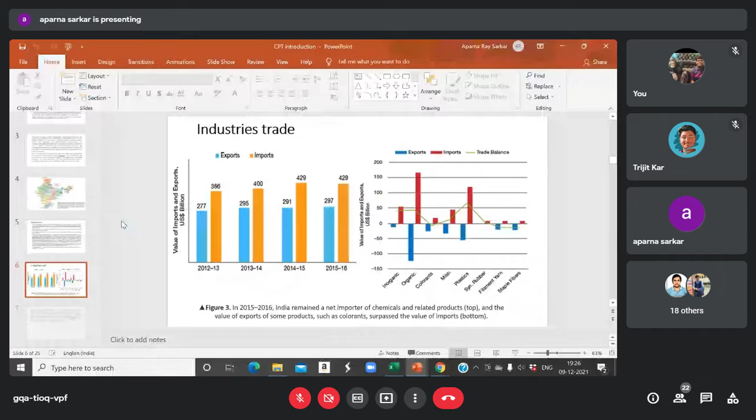So in case of import, in 2013-14 we have 400 US dollar in billion for the import section, whereas in case of 2016 we have 429 billion dollar. So these are the results of import and export.

Now another picture we have where we can see in which sector how much money we are investing and collecting. So first consider the inorganic chemical section.

So here we can see for exports the value is showing negative data, and for imports we are having 50 US dollar. For exports and imports, both are different, therefore we are having this type of opposite values, therefore we are having negative positive value.

Among these - inorganic, organic, colorants, miscellaneous, plastic, synthetic rubber, filament yarn, and staple fiber - we can say that in case of organic chemical, the export value is highest, that is near about minus 150 US dollar in billion. The similar result we can see in case of imports, where we have 150 US billion. And for the lowest exports, we can see in case of inorganic.

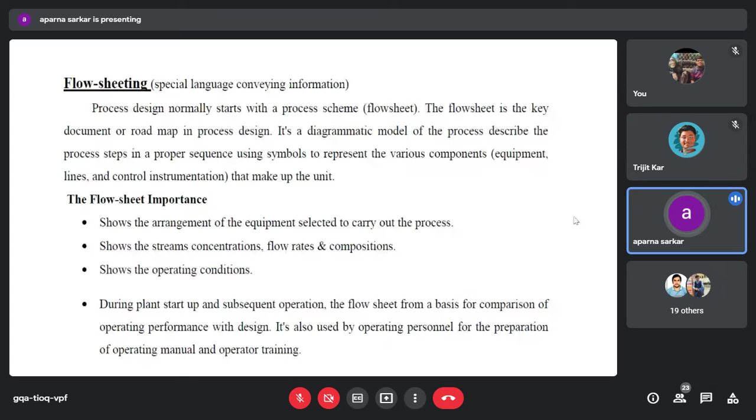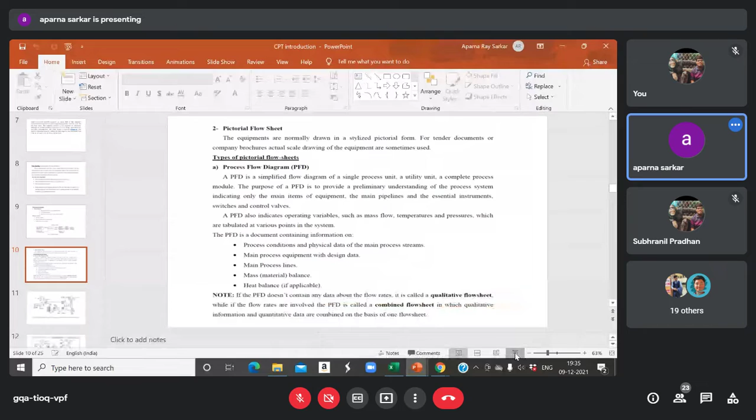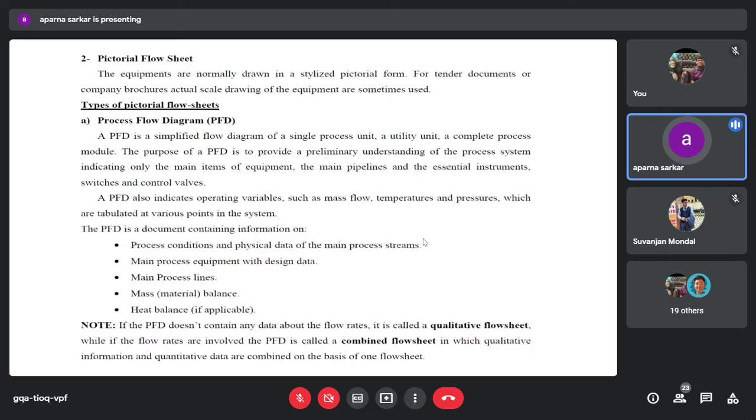Under pictorial flow sheet we have PFD, then we have P&ID and PEUFD, then PSFD.

What is PFD? PFD is process flow diagram. Here is a flow sheet, that is a PFD, a qualitative flow diagram for the manufacture of nitric acid by the ammonia oxidation process.

In this PFD plot, we can see that lots of unit processes are given as symbols. This, numbered as 1, is the ammonia feed, which is numbered. Then first ammonia is coming into the vaporizer section - vaporizer is the unit process, so that is written with the symbol of a vaporizer. Then 1A, meaning after vaporization a new form of ammonia we are getting. Then we have 2A, where this 2A is coming - that is the air.

The arrow in every section you are watching - those unit processes are drawn like a filter, and they are also numbered. Every unit used in this process for the production of nitric acid is written with a number and proper symbols. Proper symbols mean unit operations with arrows. So this is the PFD diagram.

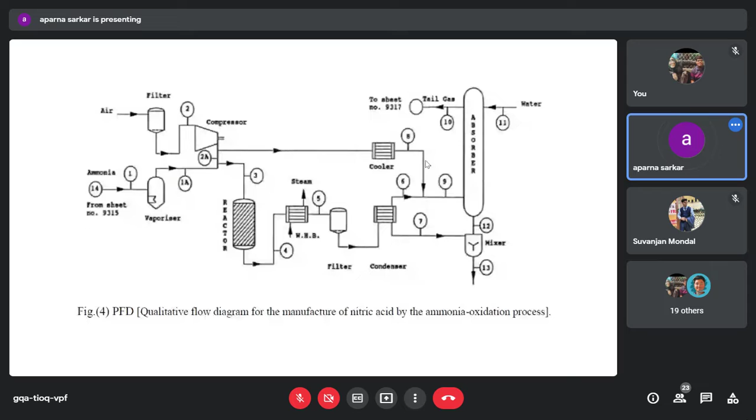So what does this P and ID include? All process equipment is identified by an equipment number. We have pipes, pumps, instruments, valves and other fittings. All pipes are identified by a line size, material code and line number, and all valves with an identified size and number. Then fittings are there, and all pumps are identified by a suitable code number, along with control loops and instruments. So these are some features of P and ID.

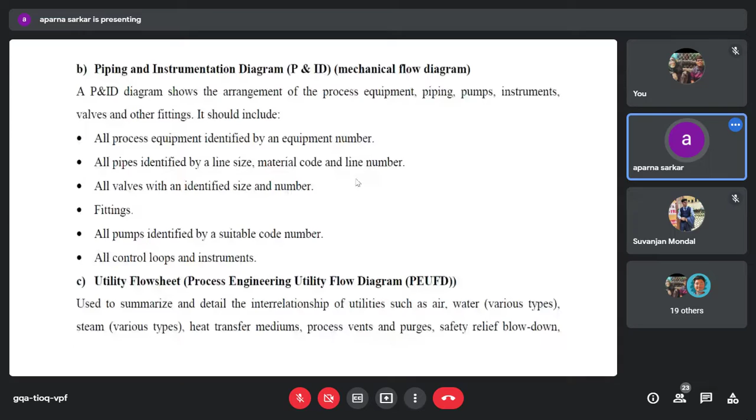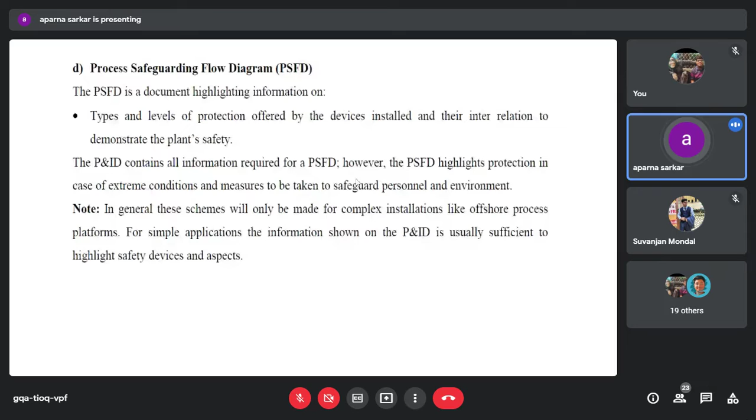Then another diagram we have is the PEUFD, which is a document containing information about utilities. A typical process uses utilities such as water, air and electric power. Water may be used either in the process or for cooling or for production of steam. This air may also be used in the process or for instrument applications. PEUFD shall state characteristics and consumption figures of the particular utility concerned: cooling water, fire water, drinking water, steam, plant air, instrument air, fuel, inert gas, and similar utilities.

So with this fitting, valve, and pipe, where we have fuel inlet, drinking water, steam plant, those inlet conditions, those process units are drawn there. Those flow sheets are known as PEUFD.

Now we have another flow sheet, that is process safeguarding flow diagram, PSFD. PSFD is a document highlighting information like types and levels of protection offered by the devices installed and their interrelation to demonstrate the plant safety.

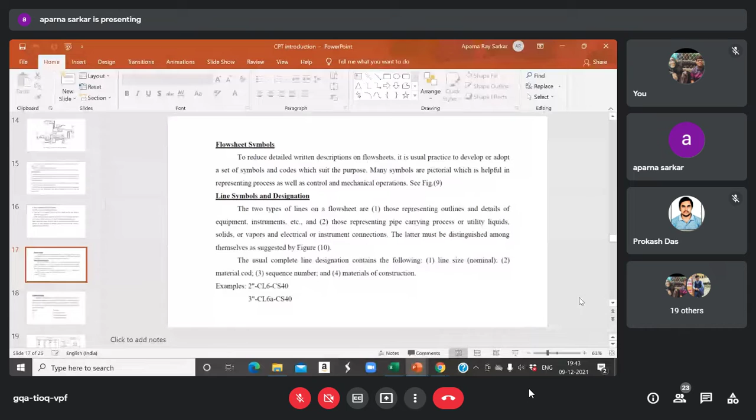Now this is the sign of a horizontal vessel. If we have this outside bracket, this is jacketed or agitated. Agitated means when we have a type of stick, and at the end of the stick we have some blades, this means it is an agitator or stirrer. And any reactor, meaning that type of vessel covered by an outer shell, means it is a jacketed system. This type of jacketed system is generally used for the collection of heat.

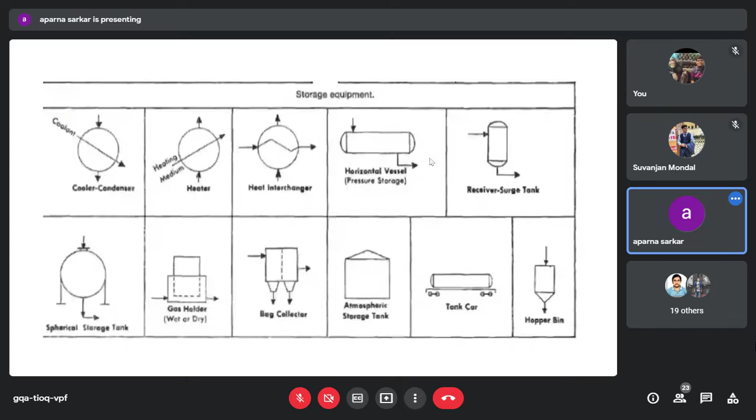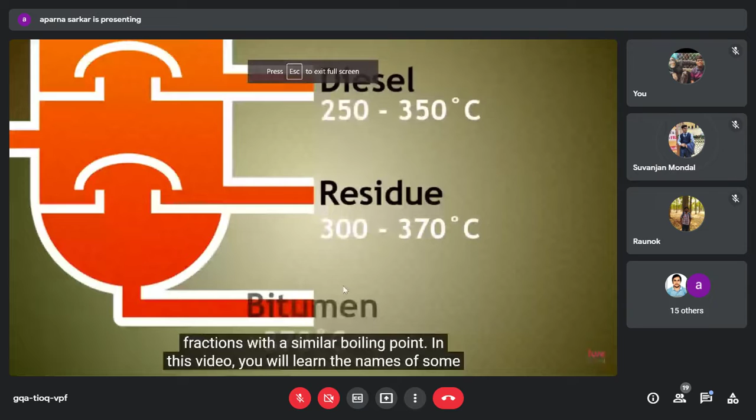In our other videos, we have learned how fractional distillation is used to separate hydrocarbons into fractions. In this video, you will learn the name of some of the most important fractions and their uses. As you are now aware, large hydrocarbons have higher boiling points and so are removed at the bottom of the fractionating column. Smaller molecules condense higher up the column. We will now take a look at some of the common fractions as we move down from the top of the fractionating column. Some of the smallest molecules are between 1 and 4 carbons in length. This fraction has such a low boiling point that it is still a gas when it is removed from the very top of the fractionating column. This fraction is known as refinery gas or bottled gas. Bottled gas, because it can be stored in bottles under high pressure. You could well have seen bottles of propane or butane running barbecues or heaters in your home, and these are examples of the refinery gas fraction.

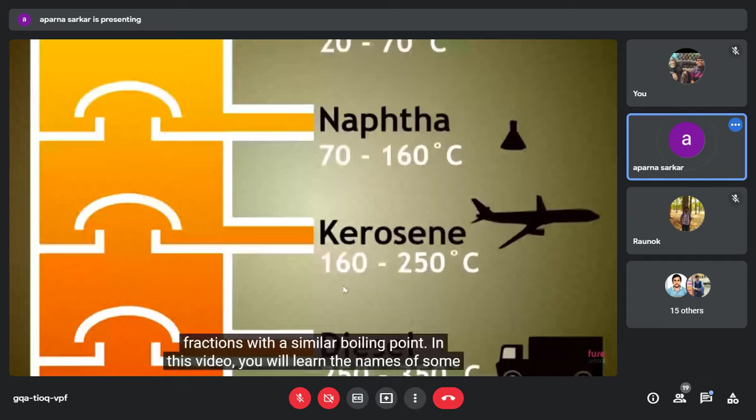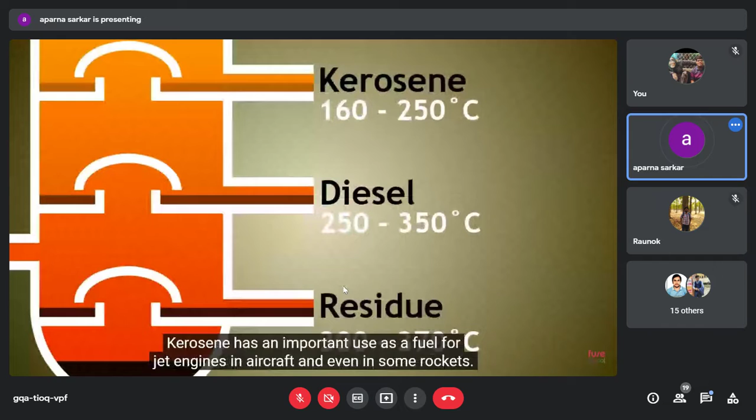Petrol is between 5 to 7 carbons in length. It is still a fraction of small chain hydrocarbons, and therefore these vaporize at a low temperature and are easily ignited. This makes it useful as a fuel in the internal combustion engine of a car or other vehicles. Naphtha is not such a useful fuel, but it is a valuable source of organic molecules, which can be cracked to make more fuels or form alkenes. Alkenes can be turned into polymers. Polymers can make plastics, which are used in our everyday lives. Kerosene has an important use as a fuel for jet engines, in aircraft, and even in some rockets. Kerosene is also called paraffin in some parts of the world. It is a common fuel burnt in paraffin or kerosene lamps used for lighting.

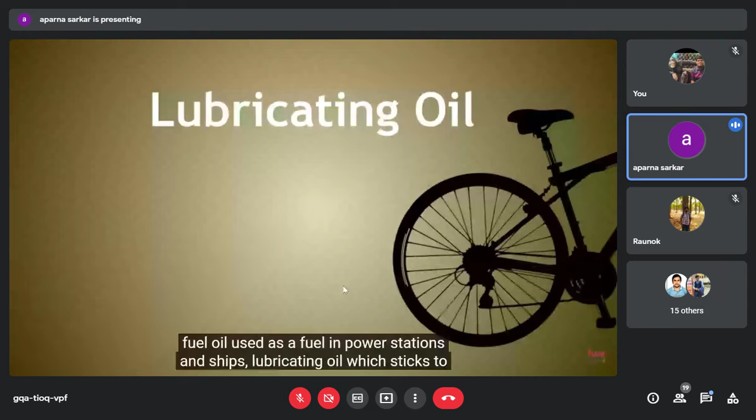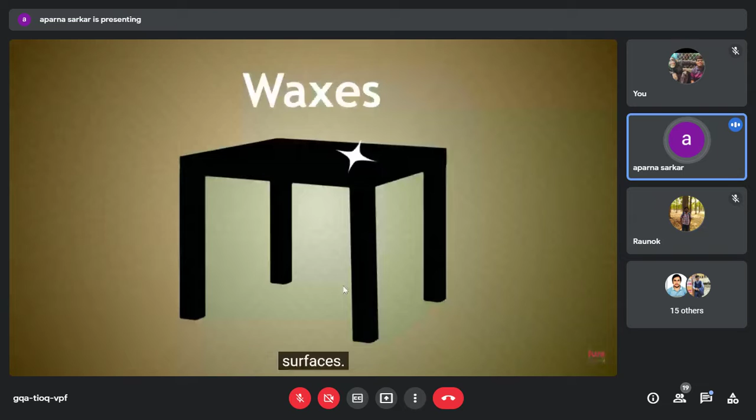Diesel is the next fraction. It is a common fuel in cars, vans, and lorries. It is not as volatile as petrol, and instead of spark ignition, it ignites under compression. Below diesel are the residue fractions. Fuel oil is a fuel used in power stations and ships. Lubricating oil sticks to surfaces and reduces friction and protects from rust. And finally, waxes, which along with the oils can be used for polishing surfaces. The very bottom fraction is bitumen. This is a thick black adhesive used on roads, either as the surface finish or combined with stone chippings to create a solid, resistant material. It can also be used to cover roofs due to its waterproofing properties.

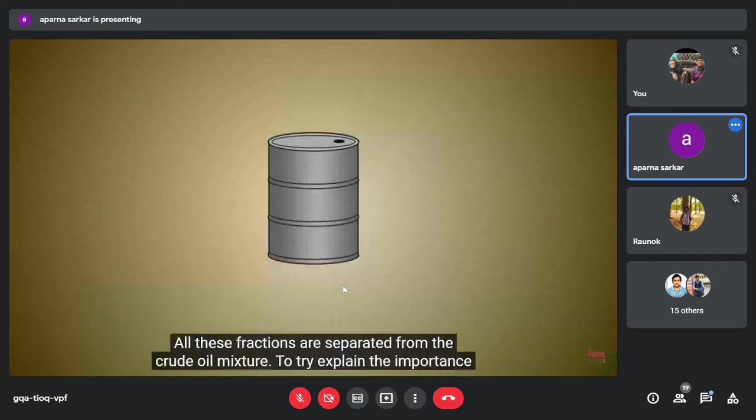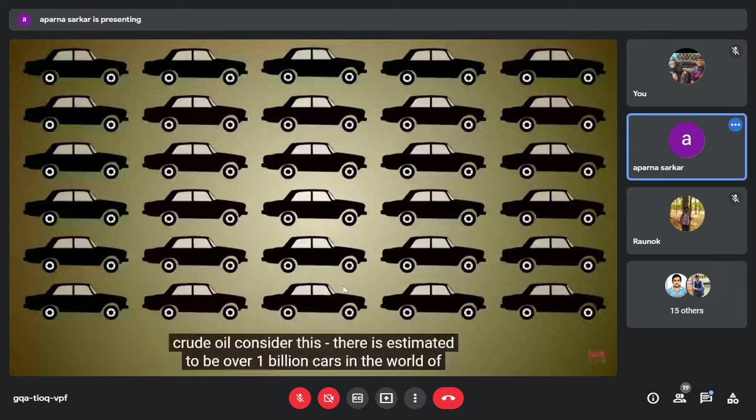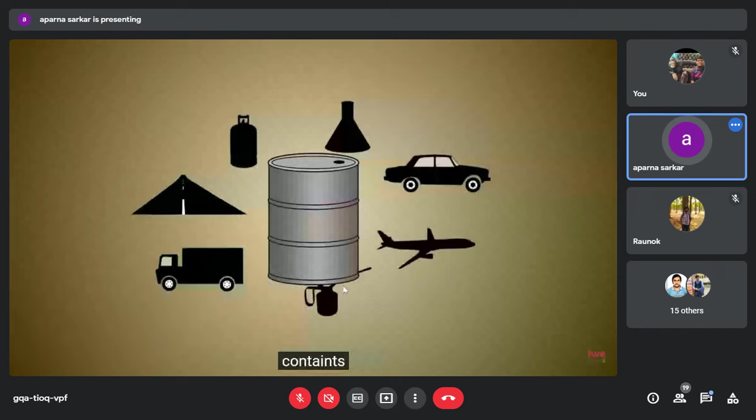All these fractions are separated from the crude oil mixture. To try and explain the importance of crude oil, consider these facts. There are estimated to be over 1 billion cars in the world, of which many will be using petroleum as their fuel. There are many million flights each year, each burning kerosene fuel. Not forgetting the massive amount of plastic that is made and used each day for products and their packaging. Even the bitumen used to surface and resurface roads around the world. As you can see, crude oil contains many useful products that just need to be separated from the crude oil mixture. Now, at the end of this lesson, you should have a better understanding of why crude oil is a valuable resource and the use of each of the main fractions.

তাহলে তোমরা ভিডিওটা দেখলে, যেখানে আমরা দেখলাম যে জাস্ট ক্রুড অয়েলকে ডিস্টিলেট করে তুমি কত রকমের প্রোডাক্ট পাচ্ছ, আর সেই ক্রুড অয়েলের যে প্রোডাক্ট মানে পেট্রোকেমিক্যাল গুলো, সেগুলো কত ইউজফুল এবং কোন কোন সেক্টরে আমরা পেট্রোকেমিক্যাল গুলোকে ইউজ করি। ভিডিওটা পুরোটা দেখতে পেয়েছো তো?

হ্যালো? হ্যাঁ ম্যাম, ভিডিওটা আচ্ছা, ঠিক প্রচুর আছে। ফ্রেম ড্রপ আসছিল, কিন্তু আমি যখন দেখলাম আমি ক্লিয়ার দেখলাম। না স্মুথ আসছিল না, অডিও ম্যাচিং হচ্ছিল না, ভিডিওটাই প্রচুর ফ্রেম ড্রপ আসছিল।

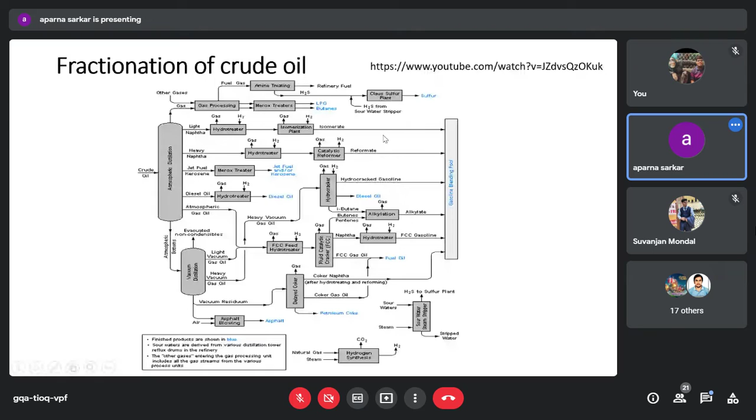LPG's initial boiling point is rated at 140. Then from plate 31, then we have 22. All are written with the plate numbers, and kerosene, JBO, RCO all come from this atmospheric distillation unit.

Now we have a small unit process used after the distillation unit, that is the stabilizer. So when products come from the distillation unit, light fractions are present, and these light fractions always try to vaporize, and if they vaporize we may lose fuel quality.

Therefore, after purification, these products are always stored in some place, so that the reactions or disturbance of the product may stop. So stabilizer is one type of unit process we use, mainly for the storage section. That is the stabilizer.

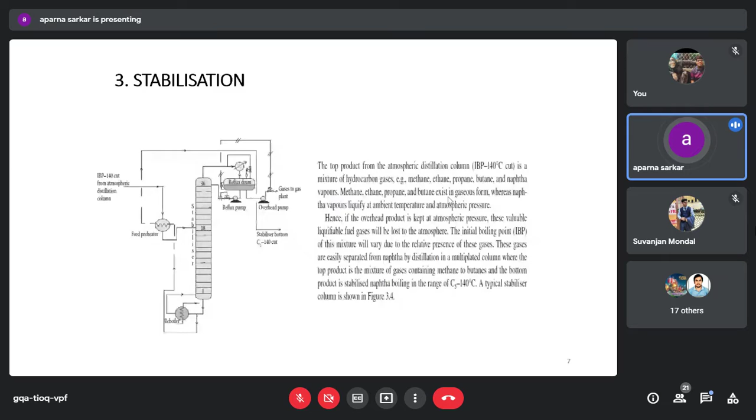Then the amine absorption that I discussed, for removal of mercaptans we use a de-ethanizer, from which we can separate the ethane part. Meroxing, then vacuum distillation.

So from vacuum distillation we can see from which section we can separate which type of fuel. Like if you consider plate number 22, from this we can separate SO, spindle oil, 24 GO, gas oil. From plate number 12 we can separate IO, that is intermediate oil.

So HO, SO, IO are basically base stocks of lube oil. They are used to reduce the viscosity of lube oils.

Then the hydrofinishing operation, that is another treatment procedure. So what happens in this hydrofinishing system...

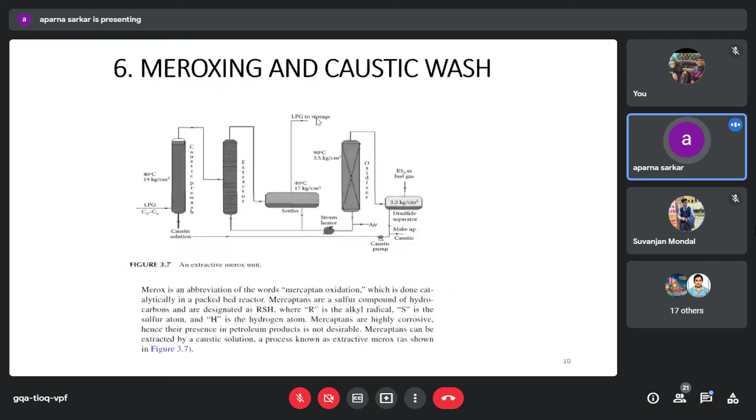In the hydrofinishing system a catalytic hydrogenator is used, and nickel molybdenum catalyst is generally used. Temperature is maintained at 350 degrees. What happens is through hydrogenation, hydrofinishing means we are separating mainly the sulfur part.

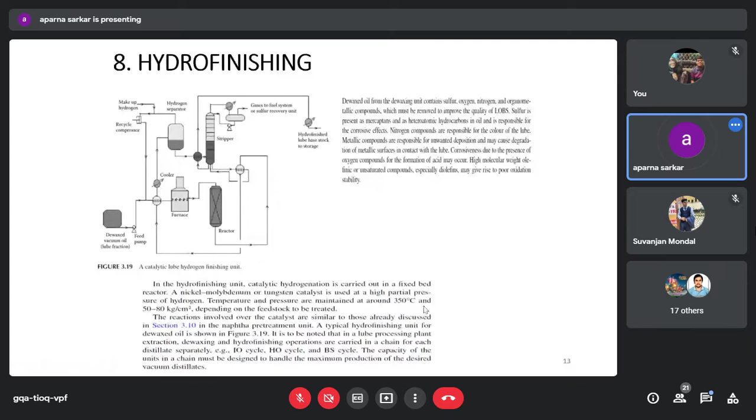কোনো সয়েল পার্ট থাকলে সেটা রিমুভ করতে পারি, বা যেগুলো মেইনলি সল্ট যেমন ম্যাগনেসিয়াম, সোডিয়াম, অ্যালকালাইন আর্থ, সেগুলোকে রিমুভ করতে পারি। কারণ নরমালি রিয়াক্টরগুলো স্টিলের হয়, আর সল্ট থাকলে টেম্পারেচারের প্রেজেন্সে সেটা রাস্ট পড়ে যাবে, মানে করাপ্টেড হয়ে যাবে। সেই জন্য ডিসল্টিং অপারেশন দরকার।

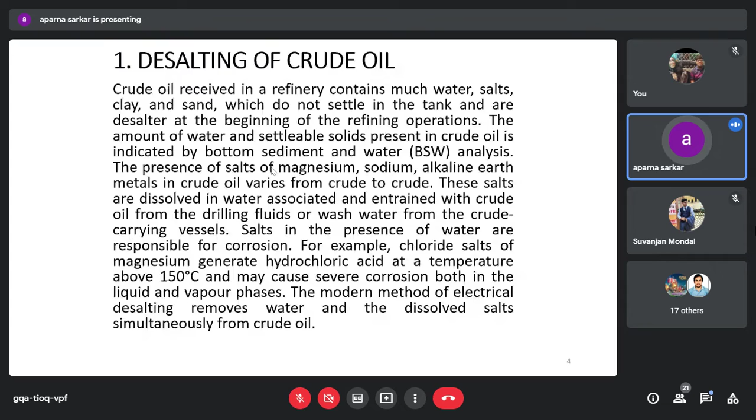ডিস্টিলেশন ইম্পর্টেন্ট, স্কেমেটিক ও ডিটেইল মনে রাখতে হবে। অ্যামাইন অ্যাবজর্পশন, মেরক্সিন, ভ্যাকুয়াম ডিস্টিলেশন, হাইড্রোফিনিশিং - এগুলো পড়তে হবে। ফ্লুইড ক্যাটালিটিক ক্র্যাকিং অংশটা বাদ দিলাম কারণ এটা খুব কমপ্লিকেটেড, কিন্তু এখানে ক্যাটালিস্ট ব্যবহার হয়।

Basically those products are coming from the vacuum distillation column. They are used, fed into this fluidized catalytic cracking.

Now bitumen blowing. Bitumen is another form of asphalt, and raw asphalt when going for operation, we need to remove this asphalt part. This is also known as the de-asphalting process. This de-asphalting is required because to adjust the softening point or penetration index, we need this bitumen. So when we remove the bitumen, it's used for another purpose.

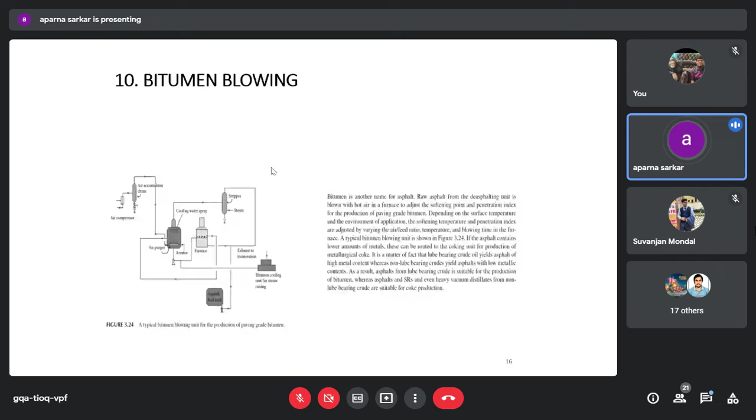This is bitumen blowing. Now, vis breaking - why is it required? Because after catalytic reforming, when the fluid is coming, we need to upgrade the fuel quality. So viscosity breaking is this vis breaking operation. For viscosity breaking production, vacuum distillation products are the main feedstock. After the operation we get vacuum oil, viscosity index, or better upgraded fuel.

Now coking - metallurgical coke production uses this coking, these are the delayed coking process. ঠিক আছে, এই নোটটা তোমাদের শেয়ার করে দেবো, তোমরা তখন করতে পারো। আজকে আপাতত এখানেই থাক।